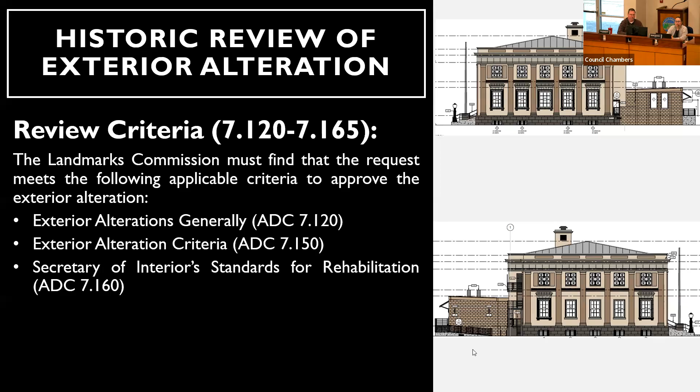So today we've got exterior alterations using the criteria in 7.120 through 7.165. And then historic review of use of substitute materials, which is 7.170 through 7.210.

For the substitute materials, this is mainly just for the windows that are on the structure, and I believe the applicant's got a better representation of which ones are getting replaced. The other things are all going to fall into the category of exterior alterations, and there is a big old list of things that are getting updated and changed, but they are primarily doors, windows, some ADA changes, mechanical units, and things like that.

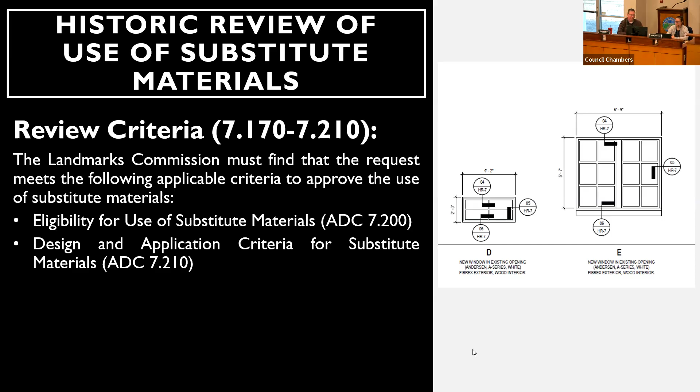So we do have 5 options. Approve the request as proposed, approve the request with conditions of approval, and then options 3 and 4 are approve one but not the other, and then option 5 is deny the request. Staff does recommend option 2. Does anybody have any questions?

Now it's on. So there's work going on the property right now, is right? Because the street's shut down, and Monday there was work going. So how does that work—are they working without a permit, or do they have a permit for what they're doing? Is the permit split? Do they need historic review before they can start work?

Yeah, so to answer your question, we did have a review back in 2022, and that's what a lot of the current work is about—gearing up and doing that work that was reviewed in 2022. This kind of folds into that, but I don't believe they've actually started any of the changes proposed with this application. They're primarily looking at that other work, which was fairly substantial. There is kind of a list in the staff report of everything we reviewed with that one. I can't remember it all off the top of my head, but it was quite a lot of work.

And then things like painting and such is all stuff that we don't do a review for. Okay, thank you, that's very helpful. Yeah, no problem. Any other clarifying questions for the staff report? Richard, maybe? I couldn't tell. I thought maybe you had something. Okay.

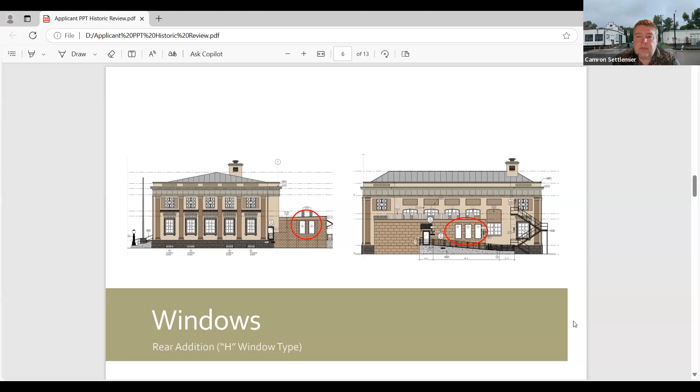So on these windows, they vary. This building has gone through a massive restoration before, so a lot of the basement grade windows are steel frame. There were a few windows, I think just 2 on the east side of the building that were blocked in, that were discovered to be a wood material. But many of them still in existence are steel frame with steel bars over the top, especially on the west, north, and south elevations.

The city of Albany put a jail down there, and it was a police department. So that ground floor - I don't remember those windows, I'll be honest about it. I don't remember the condition, and a lot of them were blocked over, and I didn't know they were back there.

I'm sorry, but Bill, you're providing testimony and serving on the hearings board on the landmarks at the same time. Okay, so I'm confused because I said I'd seen the building before. I had to disclose that I have knowledge of it. So I've disclosed that I have this knowledge. So I'm not supposed to tell you the knowledge that I have. And why is that?

So here we have our applicant, and you play a neutral role on the Landmarks Commission. If you wanted to testify, you might want to step down and be a member of the audience. I'm not testifying yay or nay, positive or negative. I'm just saying what I saw. My motion to Camron was quoting the code, and I think he left out the part about being capable of or economically viable to bring things back to repair. I don't have an opinion either way. I just know I've seen them, and if you walk by on the street, you've seen them too, so you can make a judgment based on what you see. I don't agree that what I said was one way or the other on it.

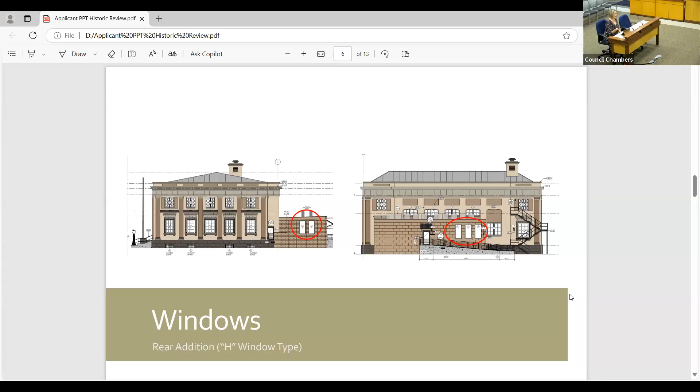Okay, so in the application narrative, under the second section, it lists what's being replaced for windows. I'll run through them briefly. Basement windows, all of them are proposed to be removed and replaced with a substitute material. What's being removed is often just a steel frame, non-original window, probably placed in the 60s when the remodel occurred. They have some existing metal bars on 2 or 3 of the windows. Those are supposed to be removed and replaced because some have rust or are unsightly or will be damaged, just to replace what's behind those.

On the rear elevation of the building, that's the most substantive part of this application. There is an H window type that's proposed. In the proposal, 1 window is to be removed. If you're standing at the back of the building, it would be the one on the right, just above where the ADA ramp is located. If you're looking at the PDF here, it's just to the right of where that red circle is. It was covered previously, it's been removed so the demolition chute could be applied, so things could be coming out of that area from the upper floor.

That one's proposed to be installed with a new window material. It won't entirely fill the original window opening. The top portion of that would be infilled. The purpose for that infill is that the design of the interior of the building, it's not an area where you want visibility to occur. The lower portion is going to be a residential unit, likely some living space. So that portion of the window is proposed to be reinstalled.

The purpose for having those 2 differences from the top to the bottom is that there is a story difference. There's an upper story and a lower story, and where that flooring material meets the window, there's not a great way, or a way that we're aware of, that you can fireproof those safely. So by reconstructing that, we can meet fire code and also provide visibility where you want it and where you don't need it for the interior of those units.

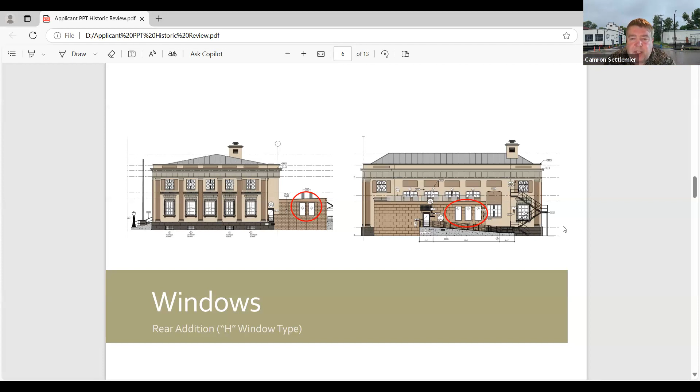Okay, thanks. Cameron had a question about lighting, do you want to go back to that? Yeah, I had one question about lighting, the LED lighting along the top. I wasn't sure exactly where that placement would be, and whether that's going to be visible from the public sidewalk or not. Let me pull up the elevation plan to refer to.

The quick answer is it's not going to be visible other than the illumination that it creates. It's a very thin material, kind of like a plastic material—very thin, flexible, pliable—and it will be inset into an area of the building. On the exterior, it would be covered by building material. It's meant to highlight an architectural feature of the building through lighting, and it'll be around the exterior top of the building, around the cornice.

Location is noted on the elevation plan. If you want that siting, I can give that to you too. Is that underneath the cornice or on top of the cornice? It's shown on top on the elevation plan, shown as L3, and you can see it on HR4. Okay, I couldn't tell from that drawing. So it's on top of the cornice and it'll be set back far enough that you won't see the aluminum rail from the street or sidewalk? Yes, that's correct. Okay, thank you.

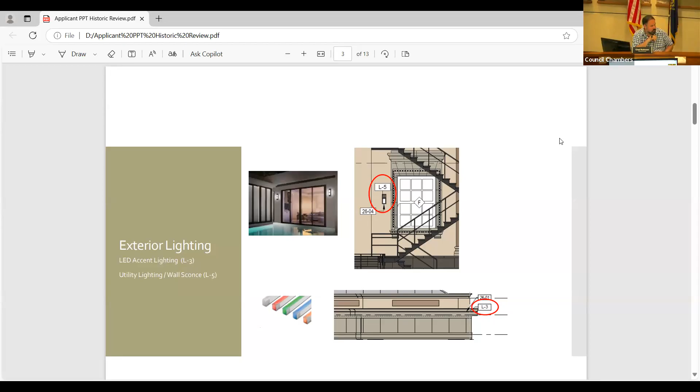Thank you, and thanks for bearing with me. I know it's a long presentation tonight. So I'm going to jump through doors quickly here, no pun intended.

That window opening will be preserved. There'll be some blocking and then a coating applied so you don't see where that original door was placed—the original window will be put back into that area, so you'll essentially never know there was a door there. That's one of the proposals, just to remove that opening that currently exists. It's a stucco portion of the building, which means there's a coating and it's painted, so it won't be visible once the work is done.

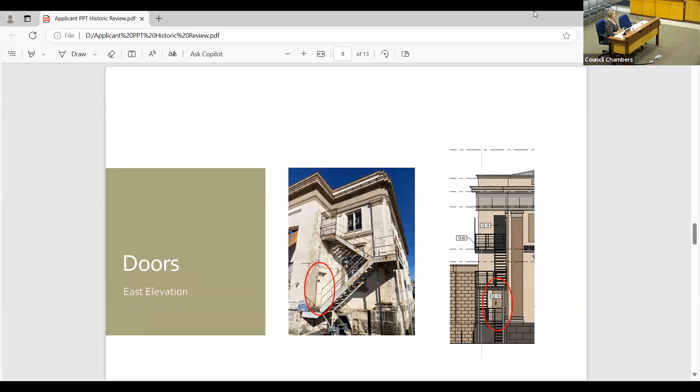The next slide just shows that fire escape that's no longer needed would be proposed to be removed from the building. Again, this is not an original feature—it was added when the remodel for the old City Hall occurred.

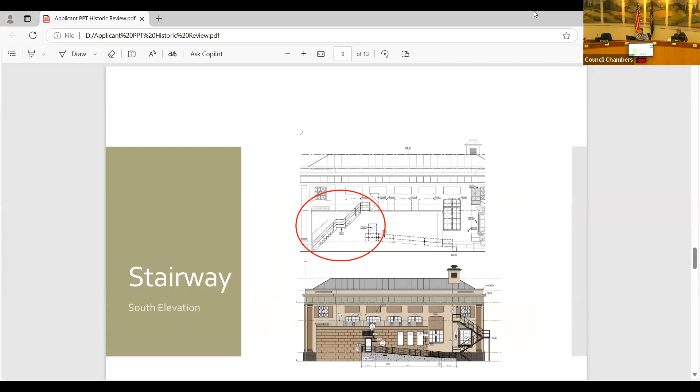Moving on to the next slide, mechanical units. These interior remodels will require modern heating and air to be provided to the interior of the building, and there's usually two options for these: put them on the roof, put them on the ground, or a combination of those.

This particular one has a full attic above the second story, with a kind of hip-style roof on top. Because of the height of the attic, you can stand up fully within it, and it has quite a lot of space up there.

You wouldn't be able to run mechanical equipment and set it on the upper roof of the main building. On ground level, it's a pretty compact site. Around it are two public right-of-ways including sidewalks, a parking lot on the east, and an alley right off the back, so there's not a lot of ground space to ground-mount mechanical equipment.

So what's proposed is adding them to the one-story rear addition. That will partially obscure them from the public right-of-way, so you wouldn't readily see them from the street. The proposal is to have them unscreened.

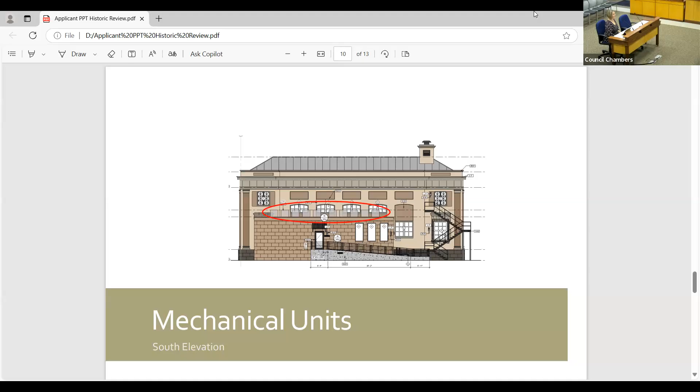The reason behind this is there are only a couple ways you can screen these types of features. You could create a false top that really wouldn't be fitting of the period it was built in, or you could put a metal screen. The thought is that the metal screen would draw more attention than just having the mechanical equipment set back as far as it can from the roof edge.

Second to last slide, so almost done here. ADA accessibility improvements: the only ADA access to the building currently, because of how it sits with grade, is a ramp off the rear one story. When it was built, codes have changed since that time, so the ramp does not meet current standards.

The proposal is to remove that, regrade it so it meets current ADA accessibility standards, put new metal black tubing handrail there that also meets current code in terms of height and spacing for railings, and then also put a metal roof covering over the entrance door, so that when that mechanical door is operating, that post can be protected from the rain.

Included in the proposal shows how those materials will be attached to it. And again, this is off the rear one-story addition.

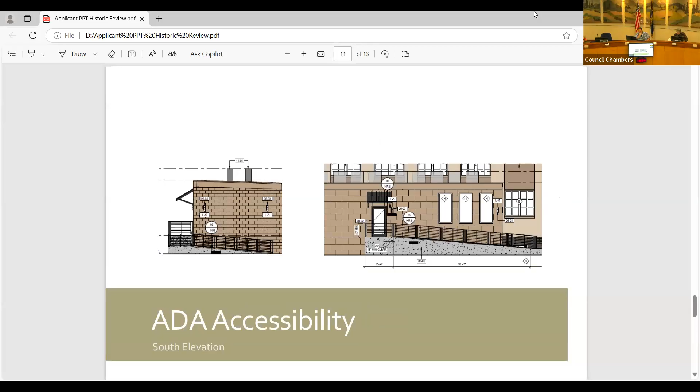This would be proposed to be placed in the rear basement window, one that you wouldn't see from the public street, to allow airflow to occur to the bottom level of the building.

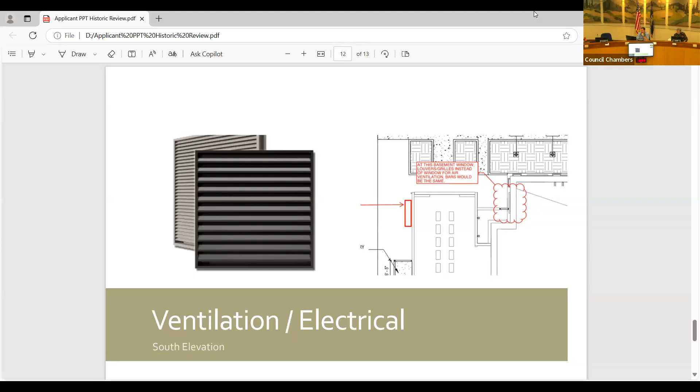So with that lengthy presentation, I'll conclude, but hand it over if anyone had questions about the items we didn't cover—doors, ADA accessibility, mechanical units, or anything else we might have missed earlier.

So I had a question about the doors. There are 2 doors being removed, one on the east side and one on the west side. Is that correct?

Oh, so there'll still be doors there. Yeah, the proposal is to have them with a full light or full glass pane, again to let natural light in where we can.

Do you know when the existing doors were installed, what the age of those doors is? Those are believed to be installed in the 60s.

From the 60s. One's hollow and the other is wood, but it's not original to the building. The doorway openings are believed to be original, though.

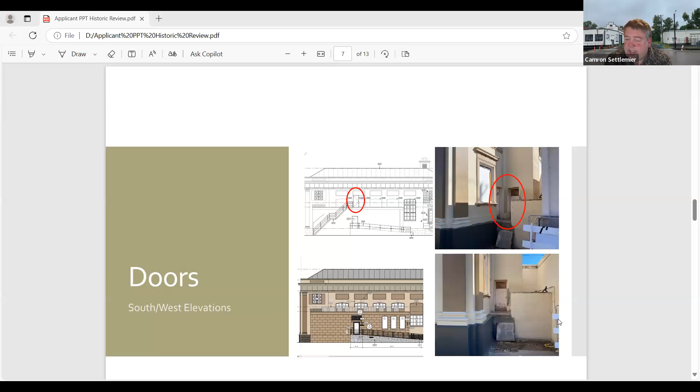I think that's all the questions I had. Thank you. Let's start on this side of the room this time. Richard? Mason? Question about the lighting. I'm not sure if you'll know the answer to this, but...

I did a little bit of research on architecture at night, and it has a place. Do you think this building would be just a glowing cube at night, or would one see angles and shadows that really enhance the historic nature of the building at night?

Yeah, I'm glad you asked. There's been a lot of thought put into the lighting. Many of the lights are just real light illumination to highlight architectural features, so a lot won't have much function other than highlighting the building. Ground mounted lights will be directed towards the building, and those will not be bright. They will not be left on all night because they'd be shining into residences' windows, so those will be decreased in lumens at night. So those would not be the security lighting.

On the front main staircase, those are intended for security. Some of the mounted lighting by doorways will also provide the function of being able to see into main entrances.

Quick follow-up: with the LED lighting on top, could those change in color? Those could change in color. It could? Yeah, yeah.